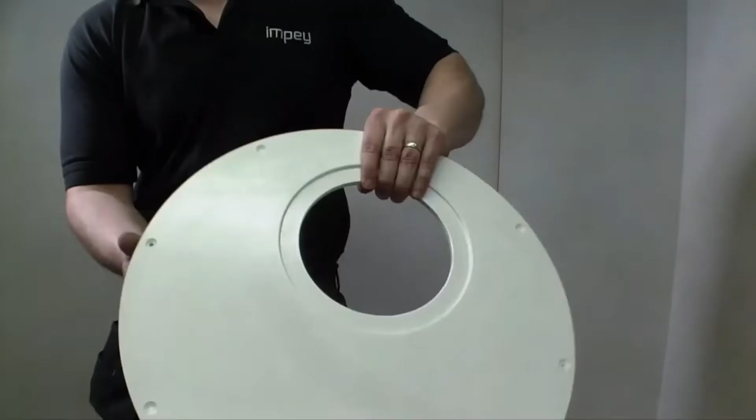The Impey Easy Fit deck provides the 1 in 40 gradient that is required in the wet room area for efficient drainage. This video guide shows a typical installation on a wooden floor. Any installation, of course, should be carried out with full reference to the supplied instructions.

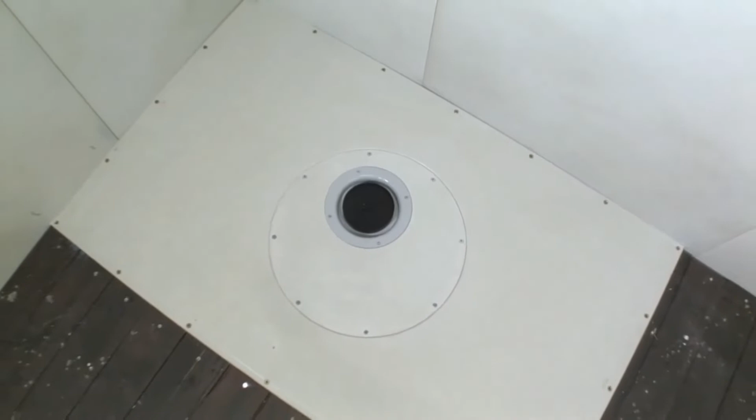Designed, engineered and made in Britain, the Easy Fit deck is the strongest and most popular wet room floor former installed and specified throughout the UK and Europe by professional wet room installers, national house builders, architects and care home providers. It can be easily installed on either wooden or concrete floors on ground level or above.

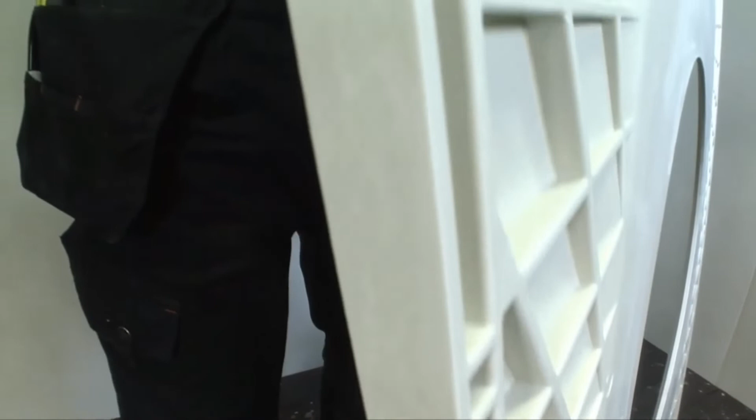At 22mm thick, the same as most commonly found floorboards, the Easy Fit acts as a direct floorboard replacement with 4 preformed gradients to accurately channel water to the drain. The hatched underside has been expertly engineered to evenly distribute loads across the entire surface area, whilst also making it significantly lighter and easier to carry than any other.

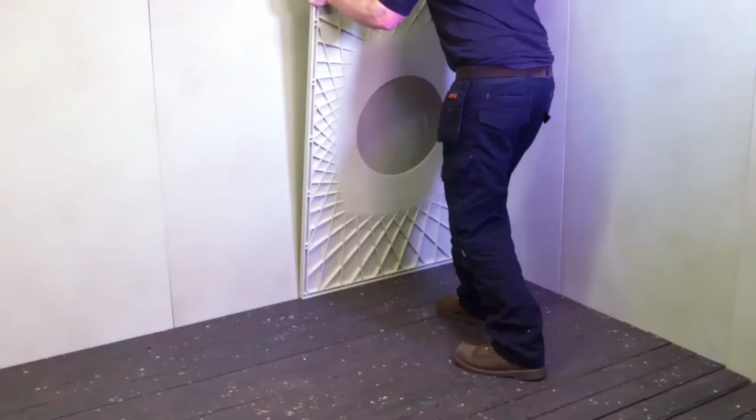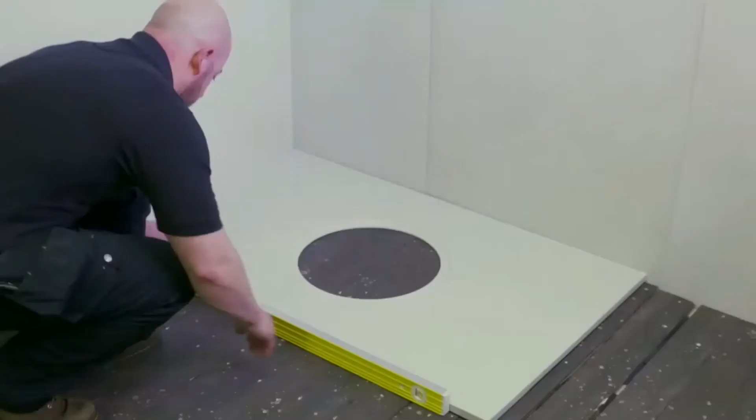The Easy Fit can comfortably bear loads well in excess of 300 kilograms without the need for underboarding, saving both time and money. To start the preparation, begin installing the deck by checking that the wet room floor is level. If not, then this must be resolved first. Please contact our technical department for further advice if required.

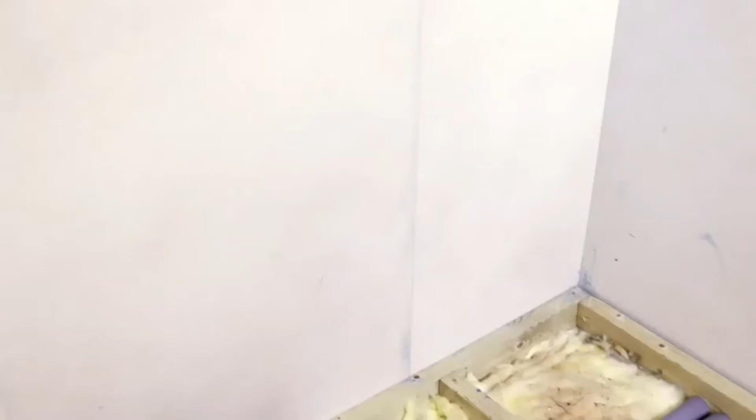Mark out the outline of the deck and cut the floorboards using a suitable saw. Then remove the boards. You'll likely find all sorts of underfloor obstructions ranging from double joists, gas pipes, water pipes and potentially many more unexpected obstacles that you're not qualified or inclined to move.

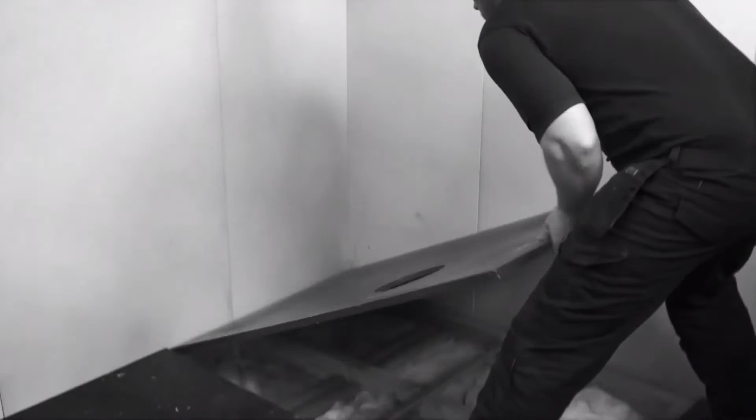The Easy Fit, with its large rotating drain plate, has been specifically designed to eliminate these all too common installation headaches. Early wet room floor formers were considerably heavier to carry on site and featured just an offset drain which provided only 2 possible areas to locate drainage. The rotating drain plate provides a wide range of locations to position the drain and avoid all obstructions.

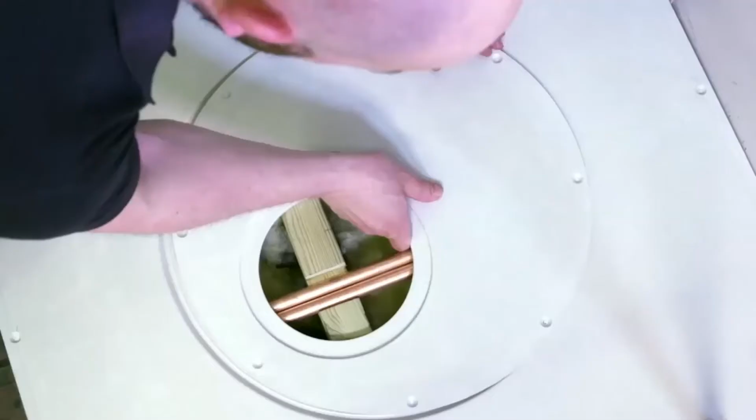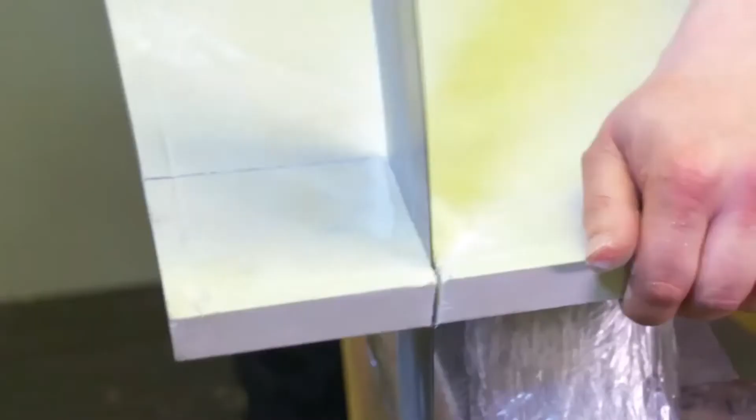This unique element of the Impey Easy Fit range can easily save up to half a day's installation time or more. And better still, if you need to trim the deck to suit boxed-in pipework areas or irregular wet room corners, then this can be easily achieved by simply cutting the hatched area with a standard handsaw. It's important to note that only the hatched areas are trimmable and the smooth underside should not be trimmed. For further advice on trimming, please contact our technical team.

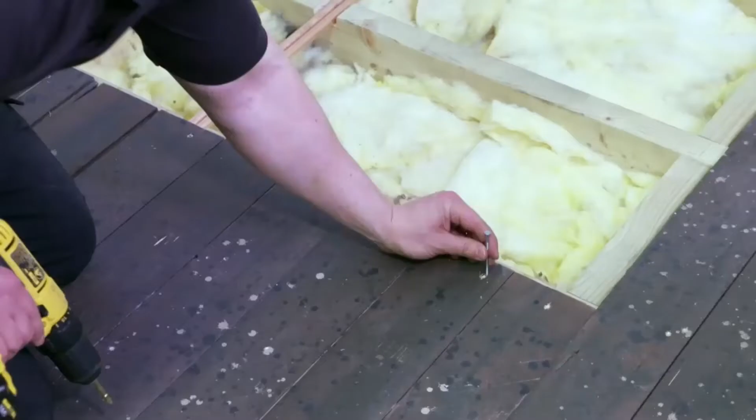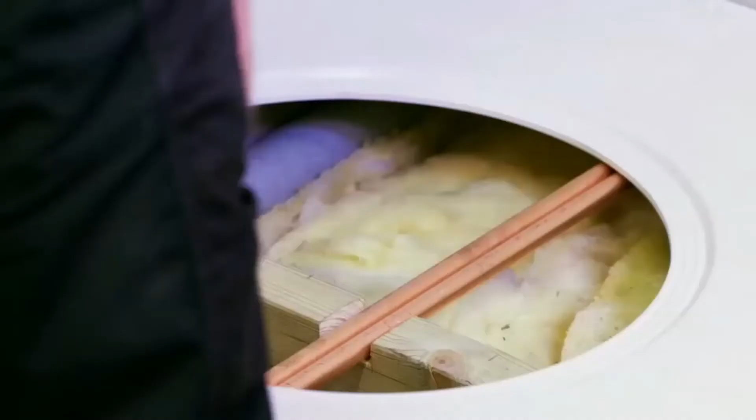Once you've found the best location for your drainage setting, you'll need to secure down the exposed ends of the cut floorboards and then fit noggins to the perimeter of the space, whilst taking care to check that the deck remains level. When complete, you're ready to begin linking up and testing the drain. Unlike one-part drains, all Easy Fit decks are supplied with a 2-part drain, which allows for full water seal testing before the top drain section and floor former have been finally secured.

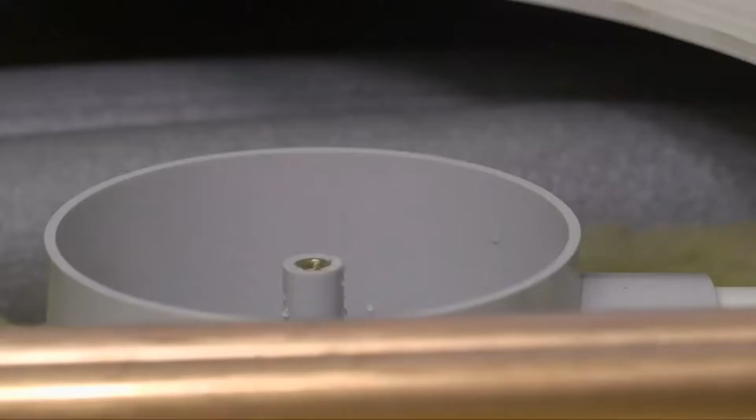Apply solvent weld to the drain outlet and waste pipe. Once this is cured, pour a quantity of water down into the sump so that the water exits into the waste pipe. In this instance, we're using a horizontal drain. However, vertical versions are available.

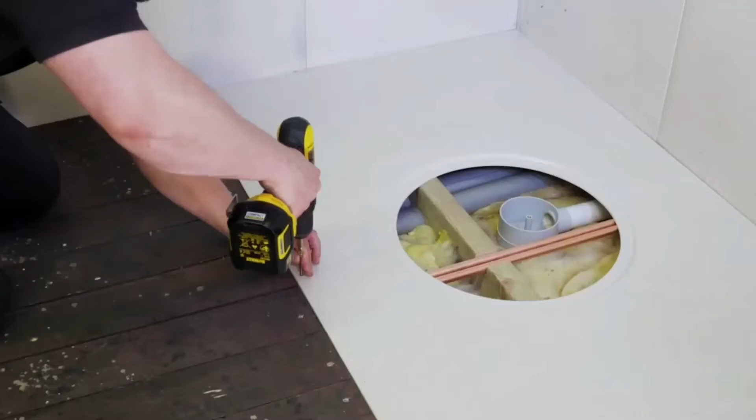Once a watertight connection is confirmed, you can begin to secure the deck into the floor by inserting the wood screws provided into the pre-drilled pilot holes. Continue the same process with the large rotating drain plate, taking care that all screw heads are correctly countersunk, and again checking that the deck remains level throughout the process.

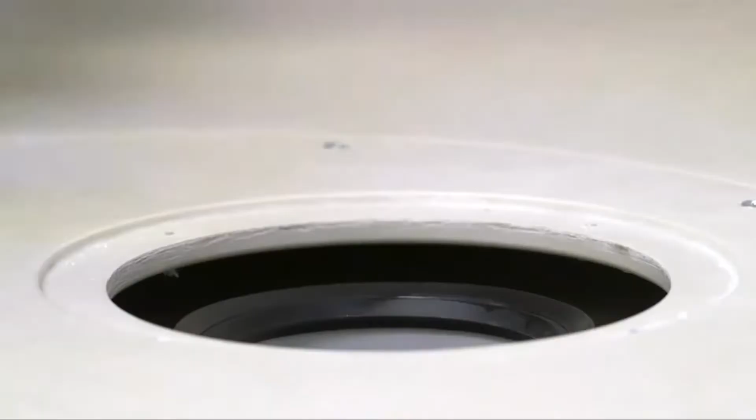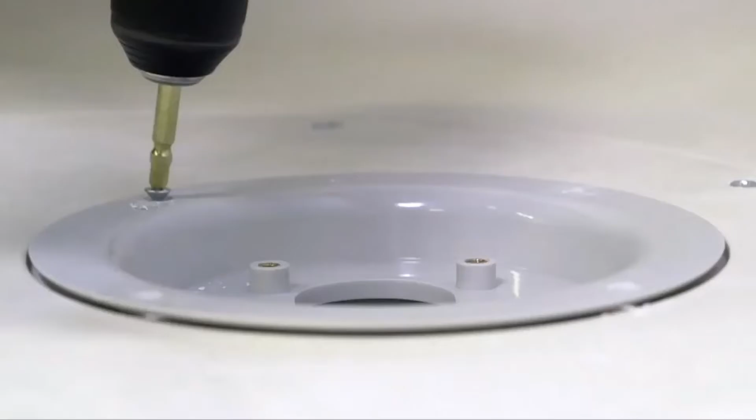The final stage is to connect the sump seal and the bowl. Ensure the seal is positioned on the rim of the sump and fully pushed into place. Drill pilot holes into the rotating base plate using a 3mm drill bit and secure the bowl using the remaining screws.

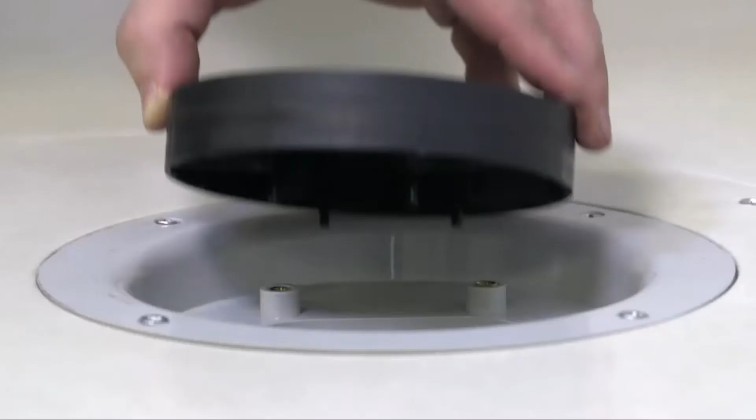Align the bowl and sump, then fit the 25mm screw through the central bowl crossbar. Tighten the screw by hand until the crossbar meets with the boss in the centre of the sump. It is essential that this is tightened by hand only and not with a power tool. Once complete, use a supplied cover to stop any unwanted debris from falling into the drain.

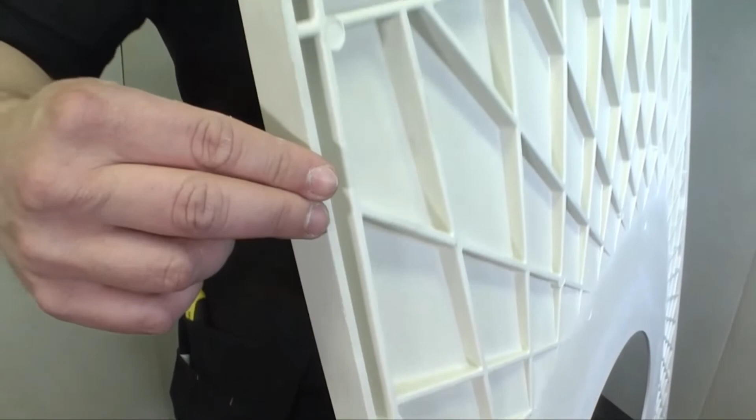So this is the Aqua-Dec EasyFit. This is the flagship product that we have for creating a wet room in every situation. So this was originally designed as a wet room for wooden floor installation, but it can also be put down into a concrete installation. Let's have a closer look. So here's the product itself. It's a 22mm former with a 1 in 40 gradient built into the surface area.

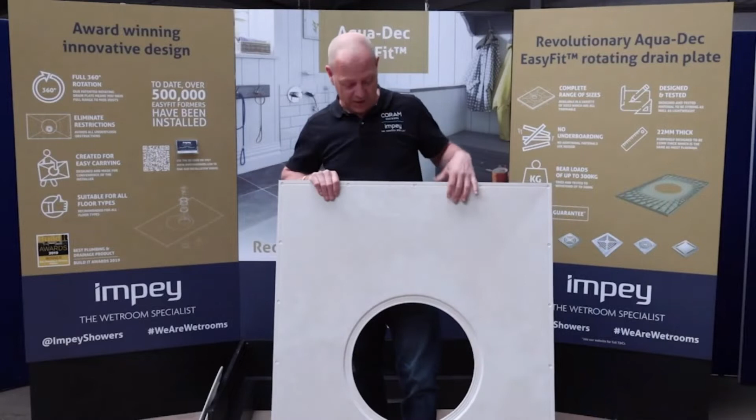If I pull it back, you might be able to see that the lines go from all 4 corners down to a point of the eccentric circle. If I spin it around, you can see the underside of it is hatched. Now, that's hatched for a few reasons. But when we put it down onto a concrete floor, you'll evenly spread the bedding that you're going to put it down onto. Now, as you saw in the video, you can cut this with a handsaw.

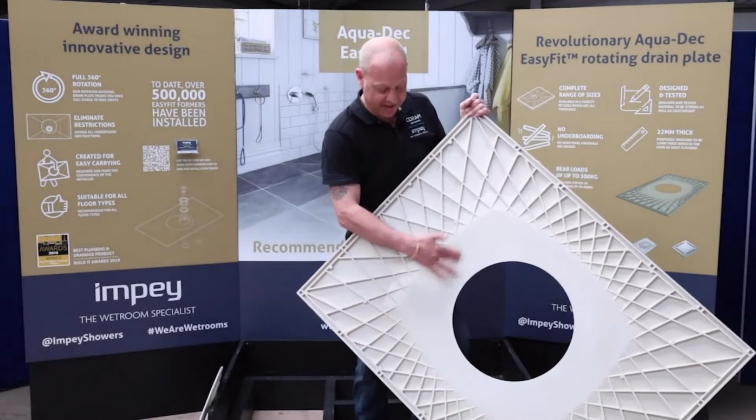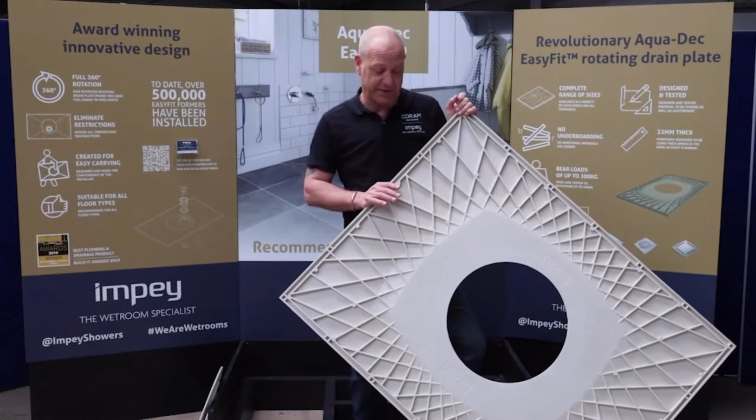Now, everyone is slightly different. Everyone has got slightly different trim on it. This one, you can cut all of that trim off of there and all of that hatched off of there. So in essence, you can cut all the way down to the smooth part under the former. If you're not sure about it, phone up our technical department. They'll give you a spec sheet which will tell you every bit of trim and every bit of central drain position that you can provide with the eccentric drain plate.

The eccentric drain plate. This is quite a clever feature. Now this one will plug the hole, and as you saw in the video, you can spin it around to avoid anything that you've got going on under the floor. So why would you spin it around? Maybe you've got double joists, maybe you've got gas pipes, maybe you've got all kinds of things that you can't legally take out of under the floor. Or maybe you just want to change the way that the former looks and performs.

For a good example, if we wanted a long and thin wet room with a drain at one end, we would cut all the hatched area off that we can. We'd position the drain hole at one end, so we'd have more deck on one side and the drain a little bit closer to the edge.

Okay, so the EasyFit Former, it looks like a shower tray, it performs like a shower tray, but the installation on it is slightly different. It's very, very important that you get this in level because there's no upstands to it. So we're creating level access showering with no upstands on it at all. So being level is fundamental in the installation. So ensure that it's level on all 4 sides.

Once you've got it down, and you've screwed it down around the outside edges where you can see the pilot holes, your best bet is to just get on it and jump up and down and make sure you take the flex out of it a little bit, okay? If it's still bouncing when you've got it fixed down, there's no reason why you can't countersink it anywhere where you've got a fixing, put fixings in just to make sure it's shored up.

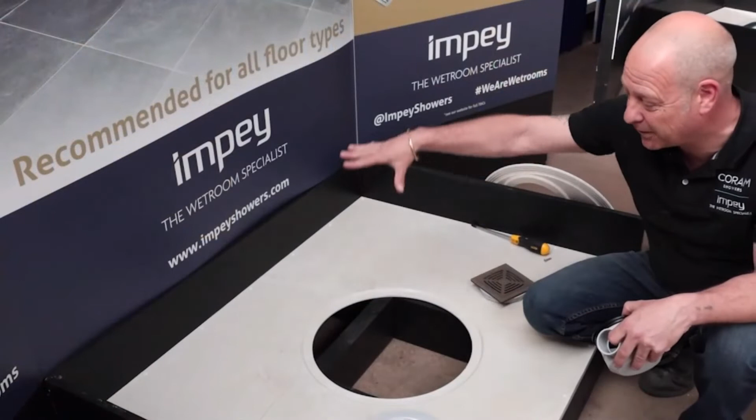Okay, so we've safely secured the former down. In this situation, we've got perfectly suited joists. If you find yourself in a situation where you might have 600 spaced manufactured I-beams or anything that isn't as level as it could be, you might want to think about underboarding it or putting extra noggins in. Do contact the technical department for advice on that, or do look at the instructions for advice on that.

So we're here now, we've got this secured down, we've taken the bounce out of it as you saw. Now you can see we've got the eccentric drain plate out, and you can see we've got a few obstructions under here. So we're going to spin the waste around to about here. Now, if you don't have to spin the waste around to avoid unforeseen things, do think about your tiler at this point. Spin it around to a place where he can get some symmetry with his tiles.

If you need to, if you're not the tiler, speak to the tiler, find out what size tiles he's going to be using, and do think about where you're going to put that drainage position to make it look the best you can make it. So at this stage, we're going to centralize it on this edge. It means we're going to get a little bit of symmetry with the cut lines on here. So this is going to be our final position.

Now, if I pull this out again, you'll see there's little ridges under here that match up with the ridges that are on the former itself. So this might seem a little bit spongy in this position right now, but once you've got this screwed in, and those bits click together, once you've got the screws in there, that creates the extra bit of strength that you expect from the former itself. So we're going to put the waste in this position.

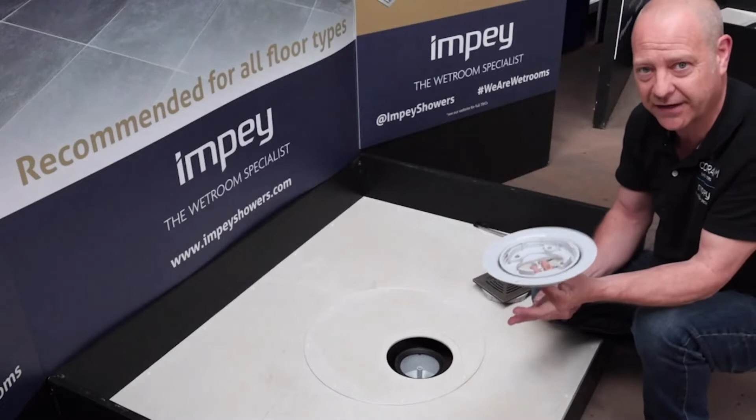The other thing I would suggest is that if you're not going through some kind of hanger, or you're not going through some kind of, I'm not going to say joist, but noggin maybe, put some pipe hangers on there, support the pipe work to take the stress off of the sump, because it is only one screw that screws that on there. So do what you can to support the rest of the trap.

So at this stage, I've not screwed in here. I wanted to get everything in dry. If I pop that in position, it's really now just a case of getting the single screw, popping that in there, and doing that up hand tight with a screwdriver.

So every one of our traps has got a 50mm water seal, which is the legal requirement for a trap into a stack pipe. Now, the 50mm water seal is created by these two components, okay? So you've got a dip tube and a bucket. So the water comes down here, fills this up with 50mm of water, and then the constant flow of water then comes through and expels the water out through the edges. So you've always got a 50mm water seal trap in there to stop the gassy smells from coming out.

So if one of those components isn't in there, you're going to get gassy smells coming out. So it's very important that both of those two bits are maintained. When you clean these out, don't put boiling water down here, or don't use neat bleach down there, because you could deform these, okay?

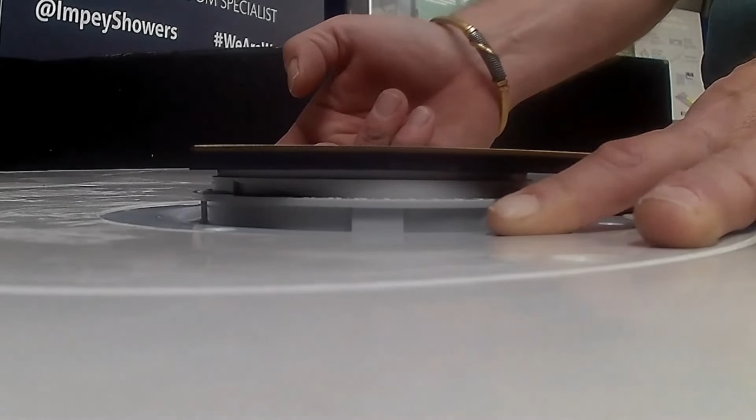So diluted bleach to clean the drains out every time. Okay, so put your finger in one of the little half-moon cutouts on the height adjustment, and if you move it anti-clockwise, you'll see that the frame moves up. That's your height adjustment. You've got 6 to 26mm height adjustment in there. We can supply a 10mm spacer if you wanted anything higher than that.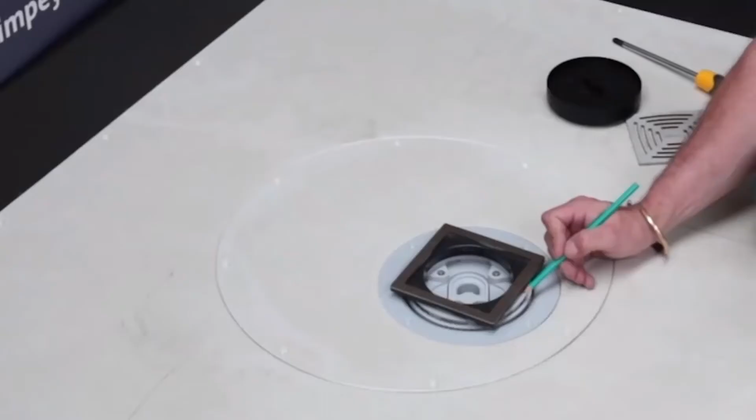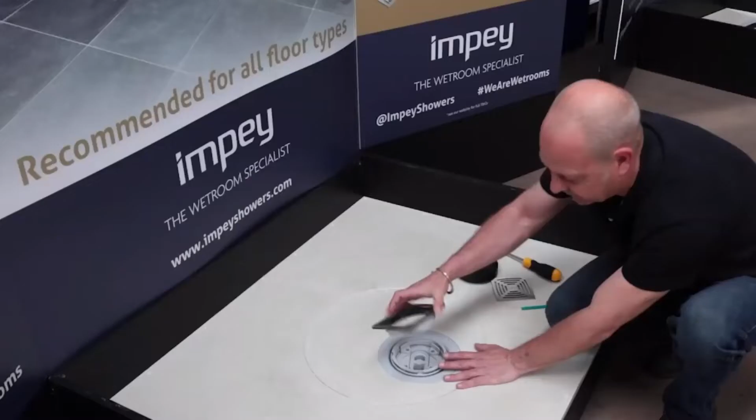So I've adjusted the height of the frame. And normally when you're doing this, it's going to be membraned by here. So once you've got the height that's desired, you mark on the rings with a pencil or a marker pen, and then you mark on the bottom. Now that would generally be on the membrane, because you've got the membrane on there. So each one of these bits will come out independently, including the height adjustment rings.

So what you want to do is get some solvent weld. You want to coat both sides of that. You want to put that back in. You want to keep it moving until you line the lines up, and then just let that go off, and then do the same with this one. Pop that back in and get it square to make sure that you've got the symmetry of your tiles.

Okay, so we've put the Easy Fit in. We've made sure it's level. If it's not level, you've got to level that up. You've got to make sure that it's perfectly level. As I said earlier, it does exactly what a shower tray does, but there's no upstands on it. We're looking at level access showering on here. So anything out by even a couple of millimeters could change the performance of the former.

So make sure it's level, make sure that it's screwed down to every joist that you can screw it down onto. Make sure that your joists are level. Make sure if you need extra support underneath it to take the bounce out of it, you've done that. And make sure the drain is positioned ready for the tiler to come in, and he can do his tiling with the symmetry that's required.

Okay, it can't be that easy, I hear you ask yourselves. Yeah, so we've seen that go down into a wooden floor, and as I said in the video, that is the perfect situation. So you might find yourself with a situation where your joists aren't level, or you've got to level the former up by underboarding it. Now that's all quite simple to do. We would insist on at least an 18mm ply in there if you're going to underboard it, something that's as structural as the former.

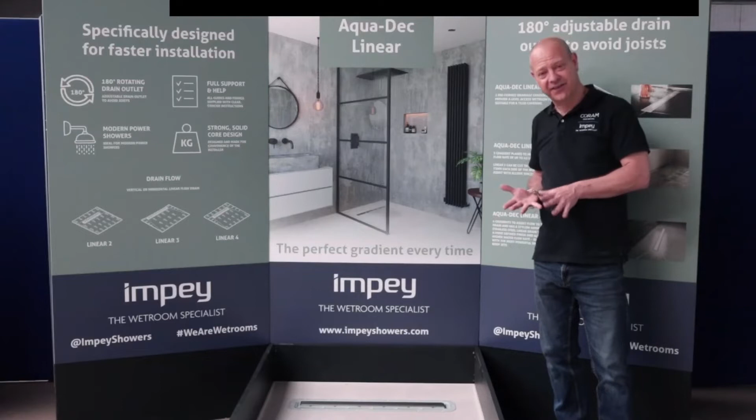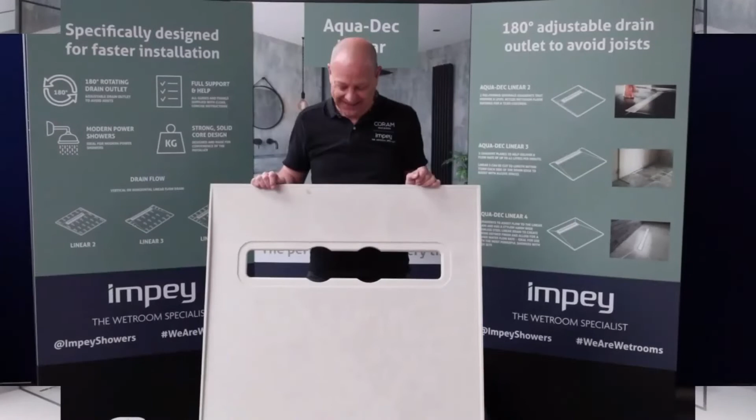So this is the Aqua-Dec Linear range. You'll see a slight difference with this one, although it does exactly the same thing. You'll see there's a linear drain in there. The linear drain is aimed for a new aesthetic, but also for a slightly higher flow rate. Okay, so here's the Aqua-Dec Linear former. And this is actually the two-way former. What that means is that you've got two ways of fall on here. So you've got front to back, and then back to front on the other side. In essence, you've got two ways of fall that drop down to where the linear drain sits.

Now, for sure, there's a slight upstand on here. This is here to keep the former 22mm thick all the way around, so it's a natural replacement for the floorboard, the same as the Easy Fit. But it's also to stop the water from falling off the edge. So if you didn't have that on there, you'd have to build that up yourself manually.

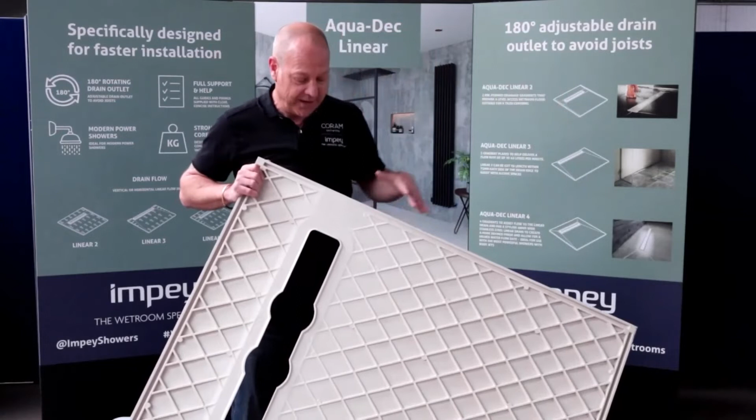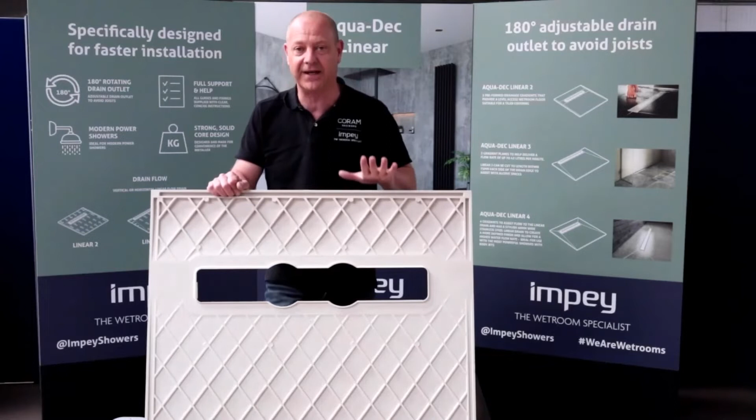If I spin it around, you see that the two-way former is made in the same way as the Easy Fit. You've got all the hatching that is required for the strength, and it's a lot lighter than the old ones. But with this one, the installation is a little bit more specific. Because it's very thin where the drain is, I don't know if you can see that little bit flexing there, this product needs complete underboarding with an 18mm ply set at the height of the joists.

Okay, so we've got the linear in position. You can see there's quite a big hole there, the aperture for the drain, and you can see there's two options here for this part of the waste. So again, we've got a two-part trap, the same as we saw on the Easy Fit, to make it a little bit easier to fit. Now we've got two options on here, just in case we've got a joist that runs all the way through. So if I wanted to, I could put it there.

If I spin it round, I can pop it into that position just to give yourselves a little bit of extra scope. Now this one, if you don't do it up tight straight away, you can spin it round, so the exit, the same as on the Easy Fit, can go in any direction that you want. Now, the thing that most people notice about these is a slight upstand. I'll show you how to deal with that in a minute.

The important thing about this is that it does need underboarding, and the reason being is because when you create a former at 1 in 40, there's got to be a thin bit at one point. And where my foot is there, you can see there's a slight bit of bounce in there. So the same as what we saw with the Easy Fit, you've got to do everything you can to avoid that. So the best you can do with this is to drop a batten in 18mm lower than the top of the joist, infill it with an 18mm plywood, and that gives you full scope to screw it down any way you like.

You'll notice on this one, it hasn't got any pilot holes, but we'd recommend that you fit 150 to 200 center screw holes in here all the way around it, and also go up through the middle. Okay, so if you put a piece of 18mm ply in there, or bits of 18mm ply in there, it gives you a fix in for those screws. Same as the other one, you need to countersink those screws, because when you put the membrane over the top, you don't want little screw heads sticking out that might puncture the membrane.

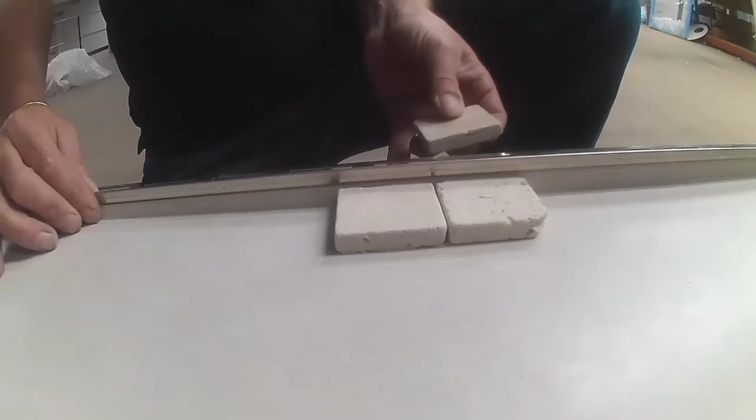So these trims are designed for 8 to 10 mil tiles, and they sit right on the edge, just a little bit of overhang of the upstand. I'm going to push a couple of tiles up against there, okay? And then these tiles then sit on top of that and make it a little bit more tidy.

Okay, so we've got the linear in position. We've tested it for flex to make sure that it's not going to flex and pop your tiles up. We've put it in, we've tested it for levels, so we know it's going to perform exactly as it should do, and we're ready now to adjust the height. We've connected the bottom of the trap up the same as we did in the other one. It's a 2-part trap with just one screw to pull it up. Again, make sure that the trap is flat when it's fixed to the bottom of the trough, and if you're running your pipe work a long way and you've got no support on those, put some pipe hangers on there to take the stress off of the trap a little bit.

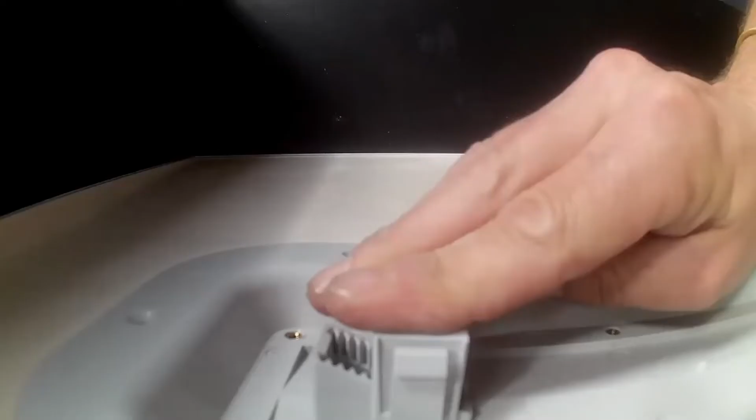So next step is to think about your tiling. So on this one, the same as the Easy Fit, you've got 6 to 26 mil height adjustment, but this one's done slightly differently. So if you look very closely at these, you've got a couple of little triangles up here, and I've got a few little plastic pieces that go in there, and those clip in until you're ready for your final fix. And this is your height adjustment. Okay, now how these work.

Now how these work is they clip into the bottom of the tiling frame. So if I pop the tiling frame in there, those are all adjusted up to the right height. The height that you're going to be working to is from the flat edge upwards, okay? So that's going to be the thickness of your tiles. If it's any more than that, you can adjust it up. Now, the way that you do that is to move the little blocks up to the next step. And if you want to go right up to the top, you can move it right up to the top step, okay? So we're going to fit it relatively low on this one.

And I'm going to pop that frame in. Okay. The clamp is for the membrane. When you fit the membrane on this one, you want to run the membrane over the top without that clamp. Pop that clamp into a position where you know it's going to be. Draw around the inside of it with something that's got a finer tip than a marker pen, maybe a biro, and with a pair of scissors you cut around that piece.

So your height adjustment is exactly the same as the other one, 6 to 26 mil. Now you've got 6 to 16 mil with the blocks that I've shown you. And if you want the 10 mil extension, you just put the other ones in. When you're happy with the right height, you solvent weld those blocks together, and then your tiler can tile up to that tile frame.

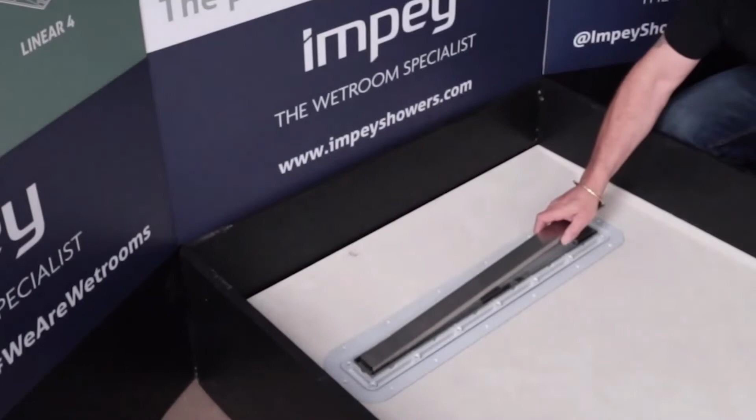So here's a slightly different option. This is what we know as a standalone linear drain. These little additional feet on here don't come with the former. You can actually buy these linear drains as standard, as a standalone with the feet on it, so that you can raise it up and build the rest of your floor up. So I just wanted to show you that bit as an additional part to that particular linear drain.

Okay, so we fitted the linear. As I said before, it's a slightly different fit. There's a little bit more work involved in this one, but it is worth it. The extra work is the underboarding. The underboarding is there to stop the deck from flexing, to make sure that you don't get cracked grout, which will in turn allow water to get under the tiles and sit on the membrane. That's fine if you've got underfloor heating in there, but you want to try and avoid that. So underboarding it, getting as much stability in this former as you can, is paramount with the installation of this former.

So we fitted the underboarding, we fitted the deck, we screwed it down, we fitted the drain, we've adjusted the height. It's got 6 to 26 mil height adjustment on there. Again, if you're not doing the tiling yourself, speak to the tiler about how thick the tiles are going to be and what bed of tile adhesive he's going to use. Or if not, leave it for the tiler. It's going to be a little bit easier.

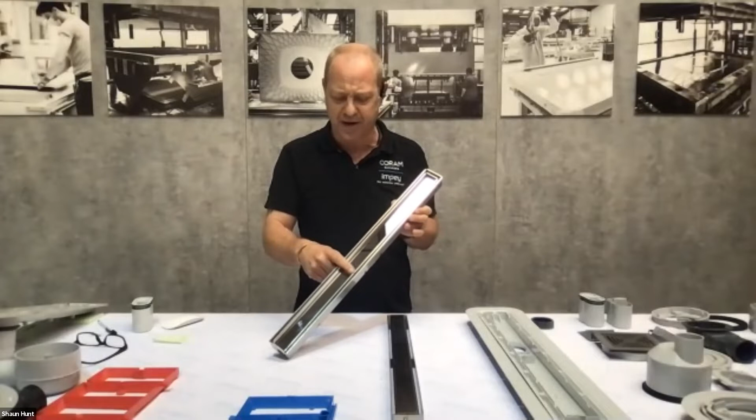The tile insert waste has a part that you drop a tile into. Now, I don't know how well you can see that from there, but you can see I can stick my finger in there. There's a depth of about 12, 13 mil in there, which will allow the tile to get put in there. Now, what I would suggest you do with this, because it's very shiny in there, is to get a bit of the tanking membrane, cut a sliver of it to put it in the bottom, and just stick that down before you stick your tile in there, so the tile adhesive's got a decent bit of purchase on it rather than the shiny side of it.

Okay, so this one is designed for 8 to 10 mil tiles. We do have a slightly larger version of it if you wanted to go a little bit further than that. But fundamentally, there's no height adjustment with this because your tile is going in at the finished height, and you tile from that outwards. So there's no tile adjustment with that. Has anybody got any questions on linear?

Okay, so the options that we've got with the traps, you haven't got as many options as you have with Easy Fit. So you see on this one, we've got the horizontal outlet on there. We can also fit the vertical one because that's an option as well. And we tend to find in concrete floor or block and beam floor that the horizontal outlet is the one that people use. You've got all the same features with that one. If I put the dip tube and bucket in there, you can see it just sits in the middle. And if I pull that out, you can see that it's got the 40mm waste outlet in there that can be rodded if necessary.

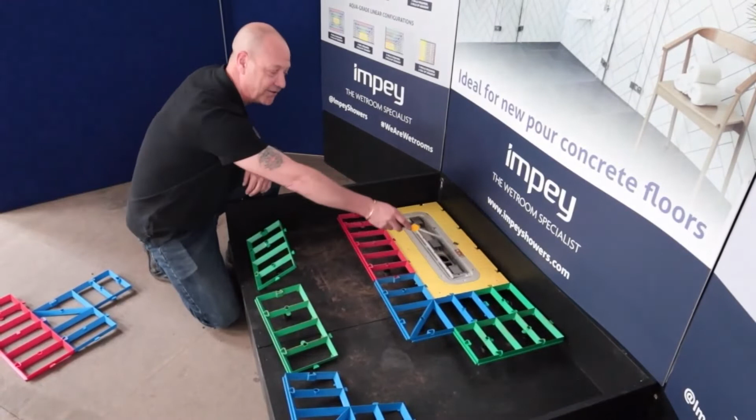So this is the AquaGrade Linear version. You can tell that because the starter section, which is always the yellow section, is rectangle. We've got it set in this top left-hand corner. In the kit, you could have it in the right-hand corner. The only difference is this little cut-down section here. So when you start at the beginning with the yellow section, you need to get this level. The way you do that is you put a couple of little legs in the bottom. There's 4 legs in the bottom. You get a Phillips screwdriver and you tighten it up to get the level. Once that's level, you can get going.

Now, remember, when you build this, you've got to backfill it with a relatively dryish screed mix. So at this stage, if you've got this yellow section and you've already got some mixed, you want to backfill this. Once you've got these bits on, it's going to be a little bit more difficult to backfill it. So if you get the opportunity, backfill it as you can.

You can use whatever you like. You can use a little pointing trowel, but the reality is you'd probably get handfuls of it and shove it under there with your hands because it's a little bit easier.

So the rule of thumb with this is when you build the grade, you've always got to build it clockwise, okay? So we'll always start in this corner and go clockwise, and the reason being is because we don't want to end up with 2 of the male pieces together because it's probably going to be right in the corner where you can't reach it. If you do find yourself with a male piece up against the corner, there's no reason why you can't just get a pair of pliers and just snap that bit off.

So you can see we've started building this already. On the bottom of here is some little feet to keep it rigid. So you build around there and you just tap the feet. If you find it's a little bit loose, you just tap it so that all the vibration's gone and you're ready to move on. Those feet aren't going to change the gradient on here because if you remember, the gradient is molded into the sections how they connect together.

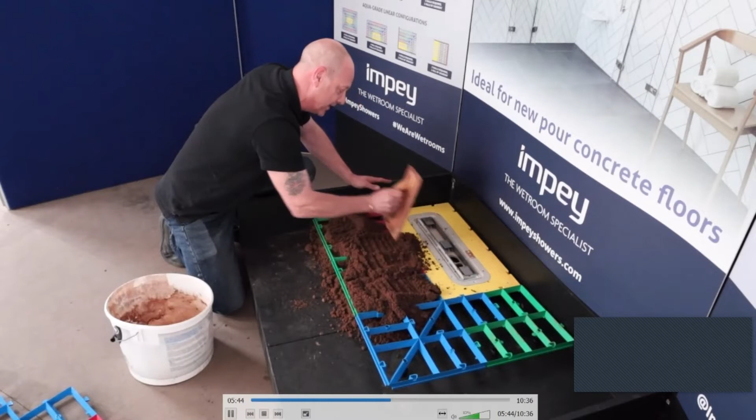Okay, so I'm just going to backfill this with a bit of this nice wet sand. And I'm going to get a plastic float, and I'm just going to force the sand or screed down into the grade. Now spend a bit of time doing this because it's very important that you get rid of all the gaps in there. What you don't want is little gaps. If you find that it's not filling it up, steal a bit from somewhere else. And just use the back of the float just to knock it down.

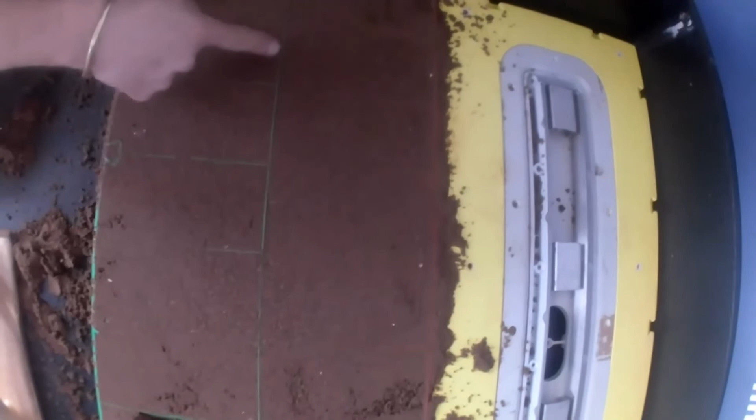And keep it tidy. If you have to run around the edge, tidy up the edges. Just keep knocking it in until you find that when you tap it, it doesn't bounce anymore, and you know you've got it completely solid. So once you've done that, you can then, with a circular motion, try and put a finish on it. Okay, what you're looking for is, you can see the little peaks of the little plastic pieces just grinning through the wet screed. Okay.

So there's a product partially backfilled; you get the idea of how this product works. As I said before, it's very important that you respect the drying time. What we don't want to see is you backfill it and set this up, and then maybe 2 days or a week after, there's people walking over it or walking wheelbarrows over it, because it needs that time to set. It doesn't pay to do it in 2 layers.

Now, the way that you fit this is horses for courses, really. The way that we would probably recommend it is that you pour your concrete floor, shutter an area off for the size that you're going to do, and drop this in afterwards, because that means you can get this outside edge exactly the same height as your existing screed, and then you can work down onto the drain to ensure that your 1 in 40 gradient is a perfect connection between what you're dropping into your shuttered area.

Now, the alternative way of doing this is to build this first, backfill it, and then pour the screed up to it. That's going to be quite difficult, because I've seen people wading around up to their ankles in screed before, and it's not very easy to get it as level as you want without spilling it over and ruining all the fine details that you've done. So it's probably better that you shutter an area off, pour your screed, and then drop this in on top of either a hardened floor or your insulation board.

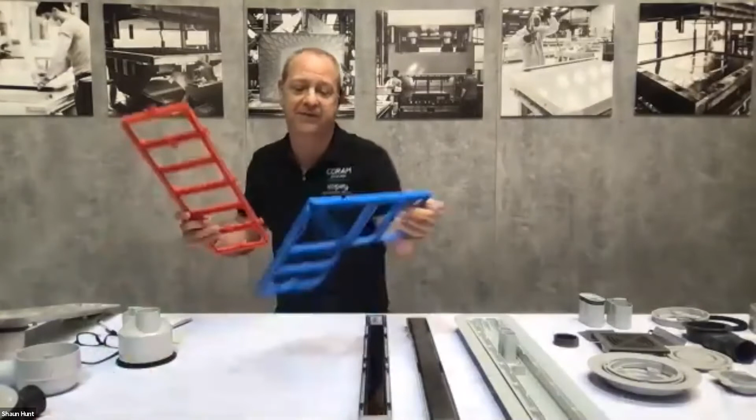So the important part really is to make sure that when you start off, you get your yellow section in and you put a level on it all the way around. The level is achieved just by screwdriver in all 4 corners. Get that level, and then you don't need a spirit level on there after that, because the way that these plastic bits clip together is consistent all the way around. They're all molded the same.

If I hold it up close to the camera, you might be able to see the slight discrepancy in the two, and it is quite slight. But the more you add onto it, the more it continues the 1 in 40 gradient. So the only leveling you need is the yellow section. Everything that you put on after that will follow form because it's all been predetermined with the molding of the plastic.

Now, we haven't done much experimenting with drying time. We'll give you the worst case scenario with a weak sand and cement mix. There are bound to be products now on the market that will dry a bit quicker. Doing a little bit of homework on backfilling it will do yourself a massive favor. I know when we first brought this out, we did try fiber-based screeds and things like that to make it bind together.

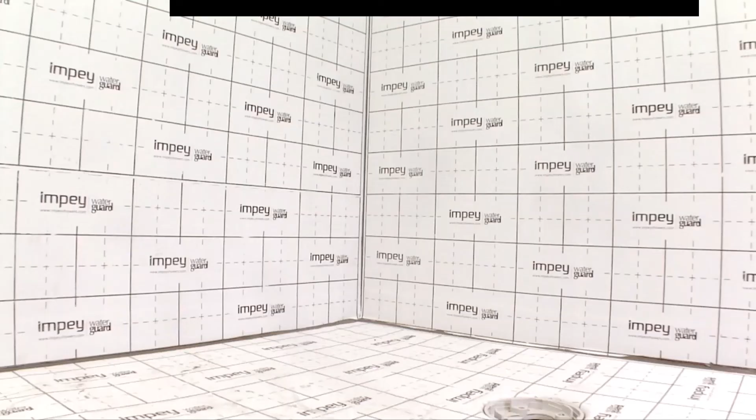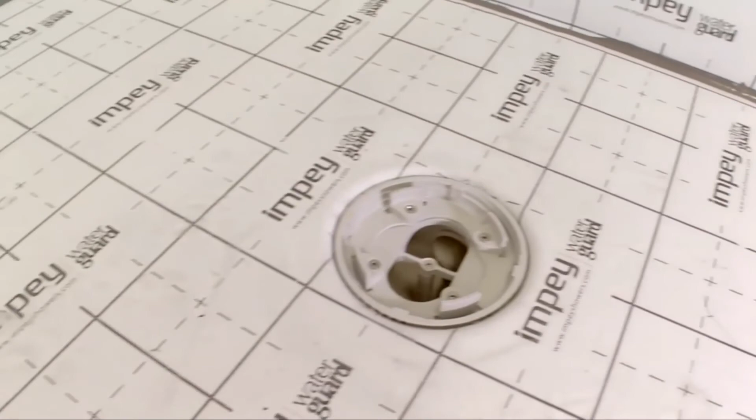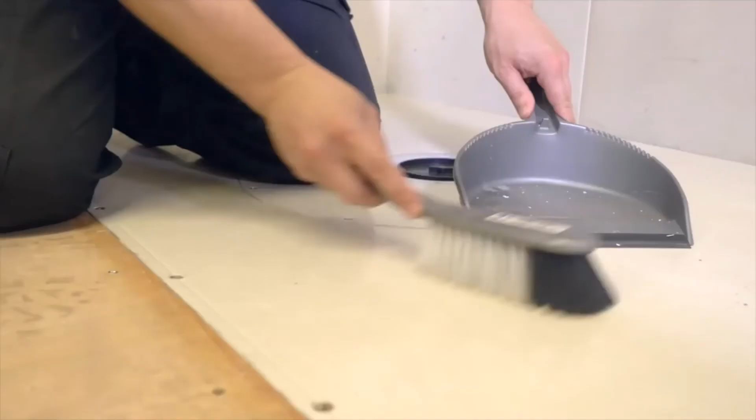Impey WaterGuard is a 1mm thick self-adhesive membrane for wet room floors and walls, compatible with all powdered flexible wet room adhesives and grouts. WaterGuard also incorporates class-leading decoupling properties of 10mm, eliminating the need for a separate decoupler. This video guide shows a typical installation on 2 walls and a wooden floor. Any installation should be carried out with full reference to the supplied instructions. The floor structure needs to be prepared in accordance with the relevant British standards before tiling. Ensure the floor and work area is clean and dry, and remove any sharp protrusions. Apply the supplied primer to all porous surfaces that will be covered by the membrane. The Easy Fit deck is not porous and should therefore not be primed.

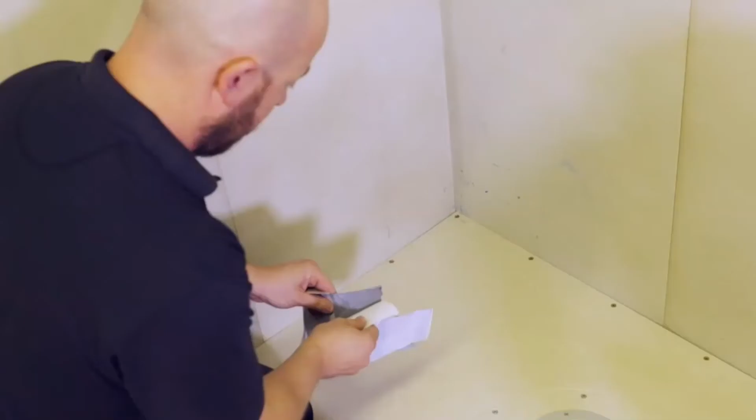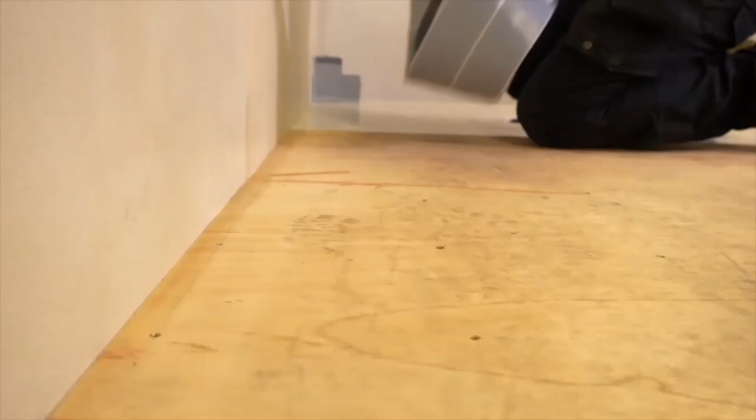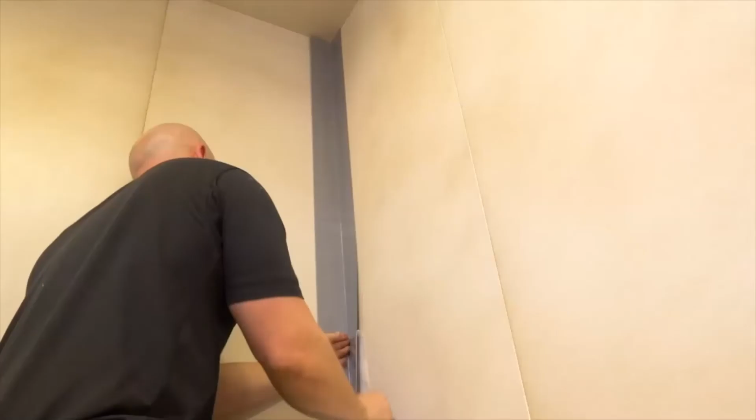Once dry, you can begin to fit the pre-formed corners. We recommend removing the back covers one at a time. Gently guide the adhesive surface onto the floor-to-wall junction and gently smooth over. Repeat for all internal and external corners. Using the jointing tape provided, equally line all wall-to-floor junctions with 75mm of tape. It's important that these locations are always taped, regardless of whether installing on walls or floors. Do the same to any affected vertical junctions. Releasing the backing paper in small stages will help in the process and allow for any minor adjustment.

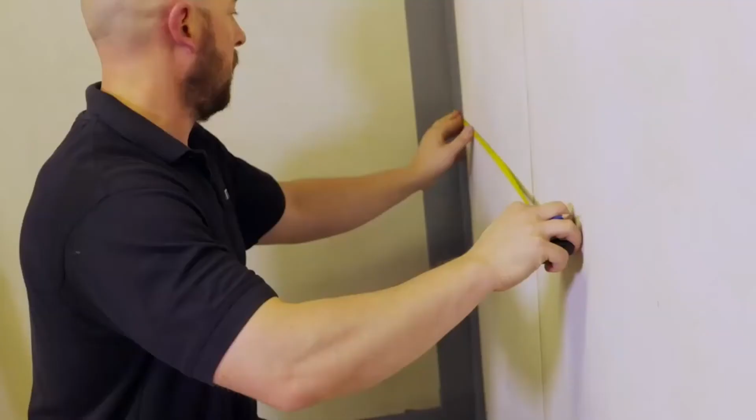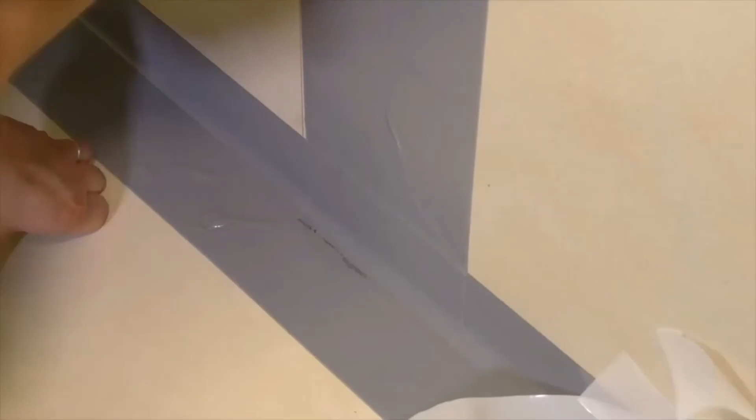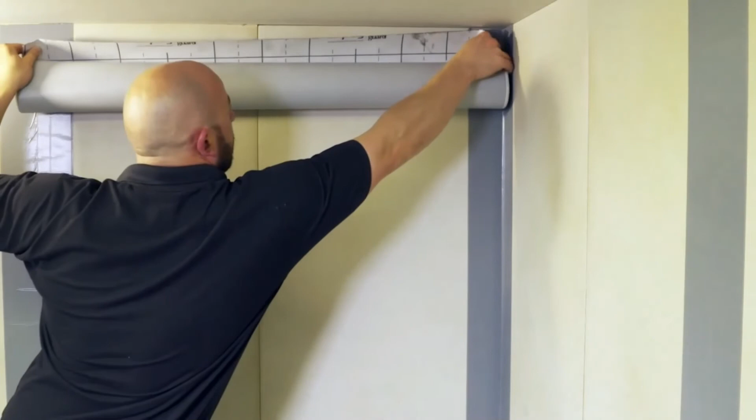Most installers prefer to tank the wall first, as it reduces the risk of damaging the floor membrane whilst working on it. Measure 1 meter vertical intervals on the wall. This will determine the center of the tape position. Cut to size and, beginning from above, gently peel back manageable sizes of the backing paper and smooth down by hand until the tape overlaps the layers at the floor junction. Repeat until all wall sections are defined. You are now ready to apply the main WaterGuard membrane. Position the edge of the membrane so that it's aligned with the center line of the vertical tape. Gradually remove the release paper and carefully set into position as you move down the wall, pressing down firmly until finally overlapping the jointing tape at the bottom.

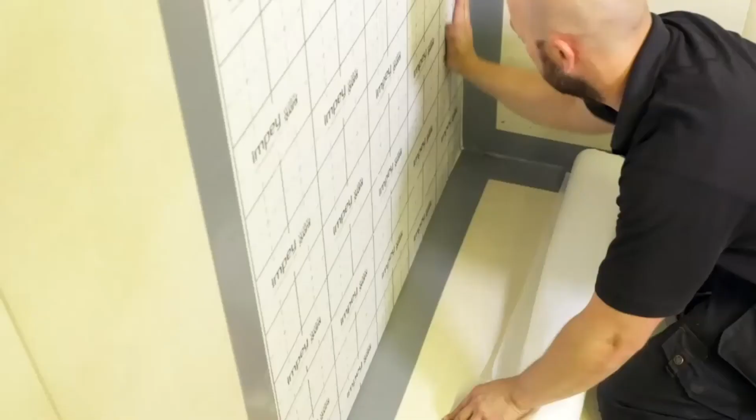Ensure that there are no air bubbles in the membrane as you apply it. Repeat the process for the next wall sheet, allowing a gap of 2 to 3mm for sealant, which will be applied later. With the walls covered, the floor will now be waterproofed.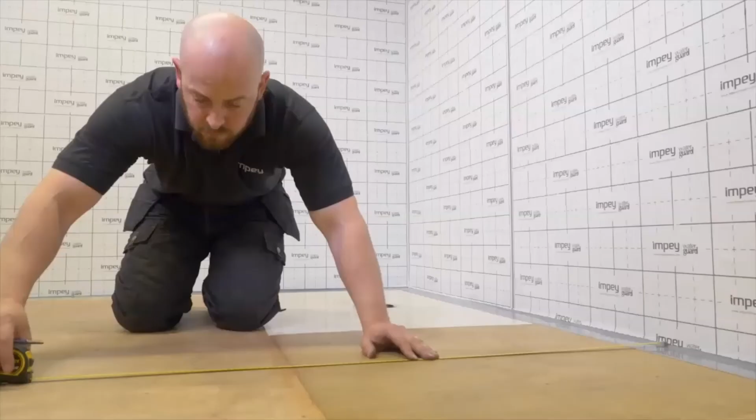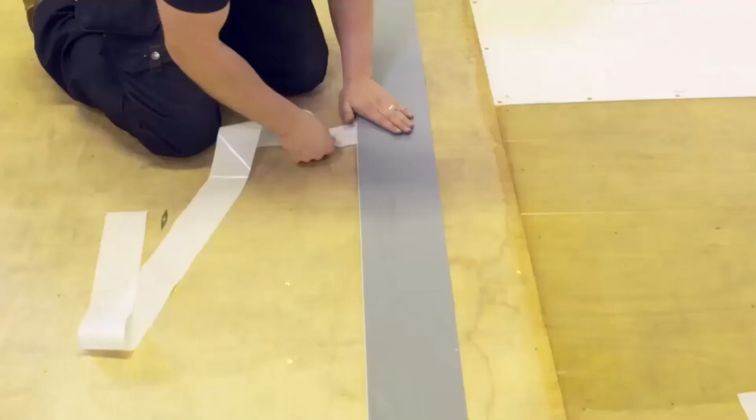In a similar way to the walls, measure 1 meter intervals to determine the center of the tape. Begin by laying the first piece of jointing tape centered at 1 meter from the wall, or 925mm to the tape edge. Repeat this process across the entire wet floor surface at 1 meter intervals.

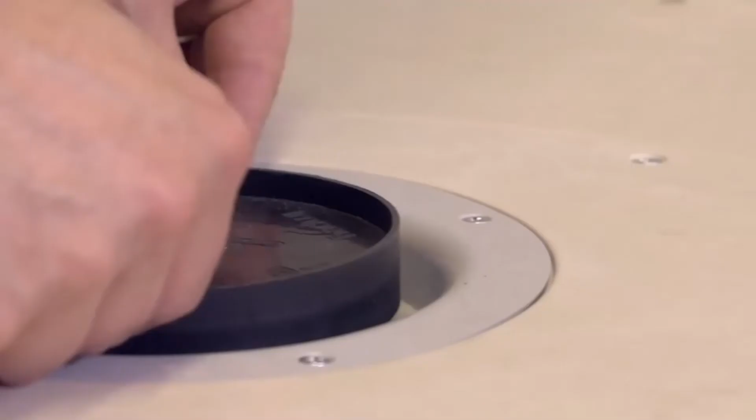Before laying the membrane, you must first ensure that the clamping ring has been removed and set aside with the securing screws, and that the cutting guide has been placed in the center of the waste. Beginning in the corner, measure across the room and cut the required length of membrane. Gradually remove the release paper and carefully set into position whilst overlapping the jointing tape.

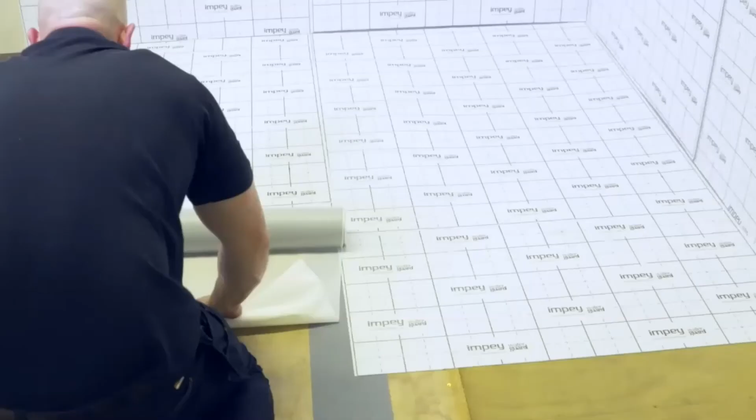Allow a 2 to 3mm gap for sealant as before. Try to avoid leaving any air bubbles or wrinkles. If there are any, smooth them out, but do not puncture the membrane. As with the jointing tape, releasing the backing paper in small stages helps make the process much easier to complete. Repeat until the entire floor is covered, including the drain.

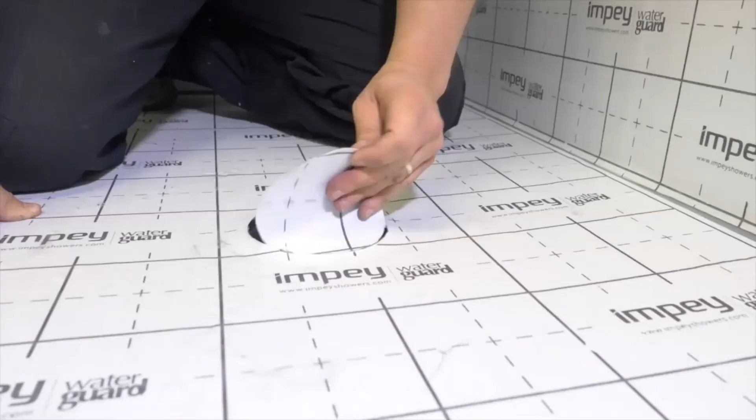The penultimate stage is to locate the drain aperture and the inside edge of the cutting guide. With a hook knife blade, carefully cut the membrane around the inside of the guide. Remove the offcuts and then press the edges of the membrane into the dished area of the drain bowl. Replace the clamping ring and screw down with 4 screws. It's important to tighten the screws by hand. Do not use power tools.

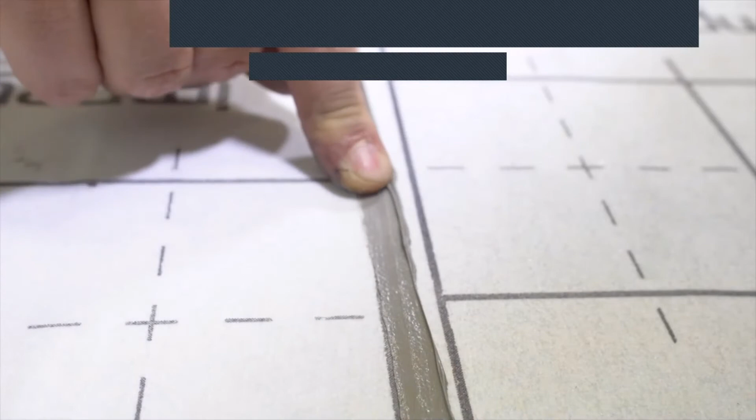Finally, apply the sealant to all gaps between the membrane and all wall-to-floor junctions and carefully smooth the sealant over. Note the sealant will always remain flexible and tacky to some degree to aid the decoupling properties of the membrane. That completes the tanking process. The WaterGuard membrane can now be tiled on without any further delay.

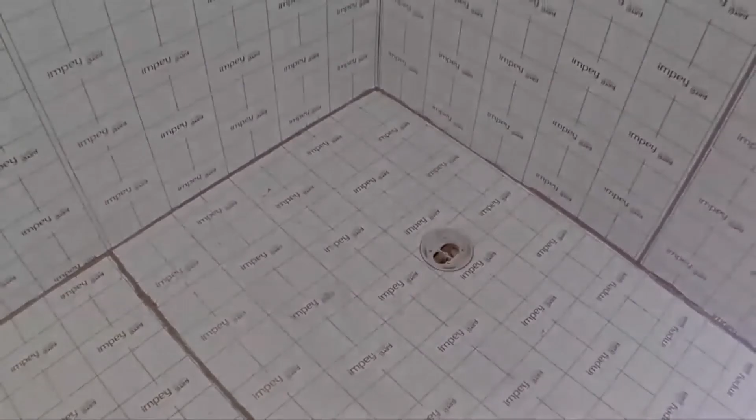So we spent as little time as we need to putting the gradient into the floor. We've shored everything up. We've let things dry off. And we're ready to protect it and protect the rest of the building with a tanking membrane that'll give you that little bit of peace of mind to be able to walk away from your wet room installation without any worries about it leaking at any point in its life. So I'm going to show you a product called WaterGuard.

Now, tanking or waterproofing is a very, very important part of any wet room installation. There are a lot of different products on the market that can do that. You can have a paint-on system. Most of the time you have to put a couple of coats on there. 9 times out of 10, it takes 24 hours between each coat. So you've got 2 days before that tanking's gone off, ready for you to tile on top of it. And it's open to human errors as well. If you miss a little pinhole in one of the corners and water gets to that, it will get through. So there's a paint-on system.

There's also a standard sheet tanking system that gets put on with tile adhesive. That, again, is a slightly laborious job because you've got to wait for drying time and you've got to apply tile adhesive at least twice to it, as well as a primer. So it's not a very quick job, although it's a little bit more thorough than the paint-on system itself.

The system that we're going to look at here is a sheet fleece membrane, but it's a self-adhesive fleece membrane that will allow a little bit of decoupling as well. But it's very quick, it's very easy to fit, it's very mess-free, and it's instant once it's stuck down. So we're going to show you a little bit of this.

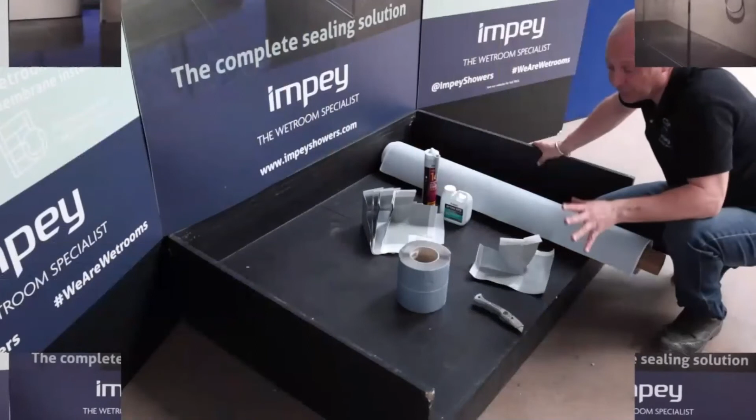So this is the WaterGuard kit. Now, this is one of 2 kits. We do a 5-meter kit and a 10-meter kit. What that gives you is 5 square meters or 10 square meters. The roll itself is a meter wide by either 5 meters long or 10 meters long, and can be cut quite simply with a Stanley knife. You get a roll of jointing tape or 2 rolls of jointing tape.

Now, this gets put on first. There's 5 internal corners and 1 external corner, just in case you've got a bulkhead or fireplace or something in there. It also comes with a bottle of APD primer as well, acrylic bonding. Now, that needs to be applied with a gloss roller, a little sponge roller.

And the reason we do that is 1, it's a little bit quicker, and 2, you don't have to put on so much. So the whole idea of putting the primer on is really to get rid of all the dust to seal in the floor that you're doing. So really, you only have to do the porous surfaces. So don't do over any of the decks, because you'll be there waiting for up to an hour for it to skin off. Just do the porous surfaces. If you're only doing the floor, remember to do 75 mil up the wall, because that's how far the jointing tape has to go up.

The tube of liquid butyl that we've got in here is for finishing. That really is to finish the butt joints that you're going to create. Just a very, very small bead of this, then just rubbed in as you saw done in the video, and that basically will deflect the water away if it gets under the tiles from that butt joint.

Okay, so when you fit this, you need to be at the stage where it's just before final fix. So what I mean by that is, when you're ready as a tiler to go in with your slippers on and everything's clean enough to be able to do this, this is the time to do it. So what you need to do is you need to go in there with a hoover, clean all the dust out as much as you can, prime it, let the primer go off.

Now, depending on what you put the primer onto, it's going to take between 20 and 40 minutes max. If you put it on the gloss roller, it means it goes on really thin. If the surfaces are porous and clean and grease-free, it's going to go off within 20 minutes and you're ready to go. So you'll notice the primer goes on clear and it goes off blue. So when it starts to turn blue and it's got no tack to it at all, that's when you need to start doing your installation.

So what I would normally do when I do this is I'll put my corners in first. I'll then connect the corners up with the jointing tape. What I normally do with this is I'll measure up how long I need. I will leave it about 5 mil shy either side so that you're not bunching the jointing tape up on the corners, because that's going to create a little bit of a problem when you come to put your main sheet on there. So connect all your corners up with the jointing tape.

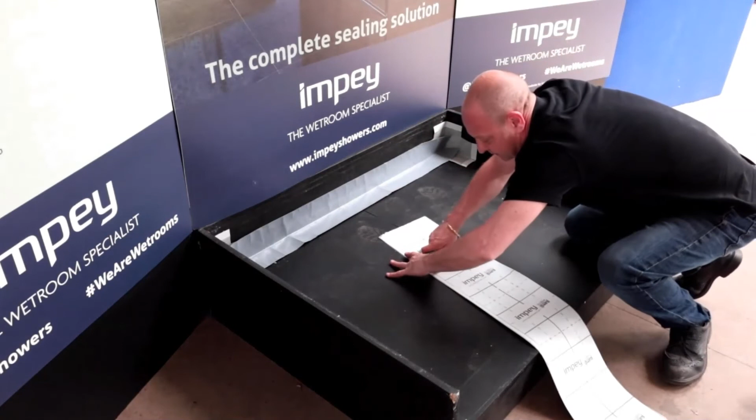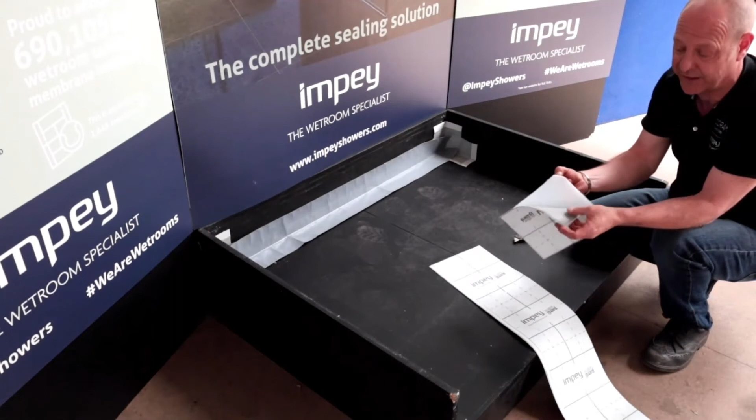Then measure from the wall, run your jointing tape down the middle for where you need to connect your big sheets up together. Now, the membrane itself, very simple to manipulate. I'm just going to run a knife through it, and that's just cut. Okay, so one of the good things about this is it's very easy to pull the backing off of it to expose the sticky part. So if I pull the plastic back and expose, this is the butyl rubber under here.

Now this is fine to be used with electric underfloor heating. It can come into contact with 55 degrees, whereas the surface can come into contact with 60 degrees. Now if I stick the sticky piece down and give it a little bit of pressure, warm it up so it sticks properly, and if I start pulling it one way, you can see it'll allow movement, but it leaves a bit of the butyl rubber behind. Now that's your decoupling, how that works.

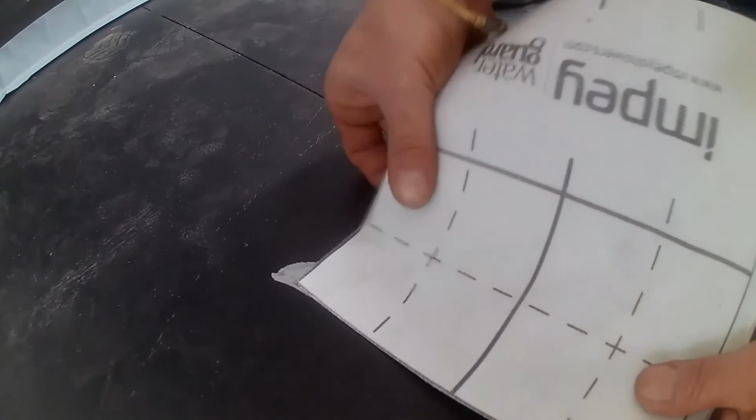So the whole of the top layer can move without affecting your bed of tiles, your tile adhesive and grout that you've already put on. So up to 10 mil lateral movement, and that allows for shrinkage, settlement, all the things that you're going to get under the floor during your installation.

Okay, when you've got your corners in, and when you've connected everything up with the jointing tape, you want to put the big sheet down. The best thing you want to do really is to just pull a bit of the backing off, let's say about an inch, and stick that down and get that right to the angle of the wall.

What you're going to find is that this wall's going to be out a little bit because nothing's ever square. So what you want to do is work from the top and just keep working backwards a little bit. And if you find that it's creeping away at a slightly different angle from the wall and it's going to end up with a bit of a gap, it might be worth you just cutting the sheet where you are, putting another piece of jointing tape in there and starting again so that you're not going off angle.

What you don't want to do is start trying to correct it once you've got half of the sheet stuck down, because that's going to create a crease or a bunch in there somewhere, and that's going to cause a few problems. So don't try and correct it. If you panic and you're moving away from the wall a little bit, stop, put a piece of jointing tape underneath and cut another piece and start again.

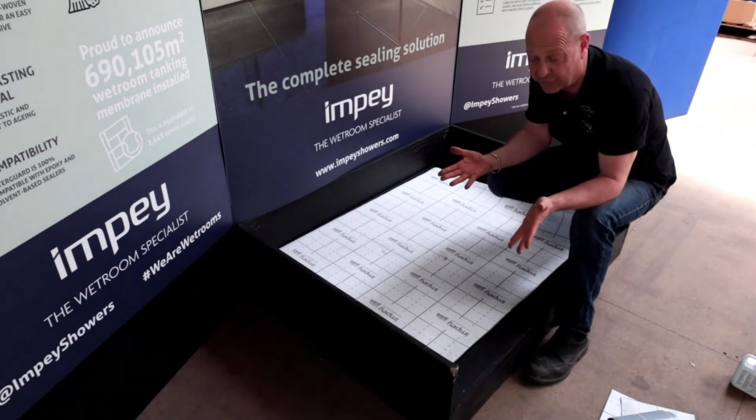As long as it's as it says in the instructions, it's not going to put it under any kind of jeopardy at all. If you find that when you're rolling out, you've got a 5, 10 or 15 mil gap in there, I would just carry on doing that. You've got the jointing tape in there that's going to give you a 75 mil overlap. Once it's done, if you wanted to, you could cut a thin strip and put it over the top, but my advice would be to finish that with the jointing compound, rub it in that edge to make sure that edge is completely sealed, and then you can just tile straight over the top of it.

Okay, so we've looked at putting water guard on the floor. Water guard can be used on walls. It's got a maximum load on the walls of 30 kilos per square meter. Do take into consideration that a square meter of tile adhesive and grout is about 4 kilos, so 26 kilos for your tiles on the wall.

It comes in two types of kits. So we've looked at the floor kit. The floor kit comes with all the corners, everything you'd need to waterproof that floor, up to 75 mil up the wall, in 2 sizes. If you want to do the walls, a wall kit can provide you a little bit of extra membrane. It doesn't come with corners because you don't need it. It comes with extra tape.

So in essence, if you've got a bigger floor than the 5 meter kit and smaller than the 10 meter kit, it might pay to buy a floor and a wall kit. You'll be able to do the whole of the floor with that because you get all the corners that you need in the floor kit.

So that's water guard. Now, the thing that you see straight away is that, apart from the primer, that is a very simple thing that you could do the day before if you needed to. There's no wet mixes involved. There's no mess with it. It's instant. Once it's down, it's doing its job. The jointing compound that you put down at the end is a belt and braces thing, and really the jointing compound is there if you do get slight bunches on it that could create a slight tunnel, and that's really there to just finish that off.